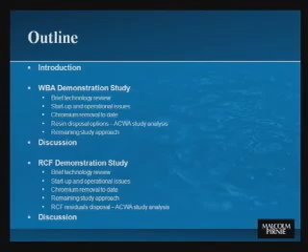Follow that up with some of the startup and operational issues. This is really the lessons learned part of the presentation, where it's one of the reasons that you have a demonstration facility before you go to a full-scale facility, so that you can really iron out all of the issues associated with it and move forward very expeditiously with a full-scale treatment.

And then I'll talk about the chrome removal to date, so how well are the technologies removing chrome. Discuss some of the residuals issues, like for weak base anion exchange, the resin disposal issues, which we have an additional grant from the Association of California Water Agencies, ACWA, to look at this in more depth, because the residuals from the process can really be cost drivers as well as more difficult to handle.

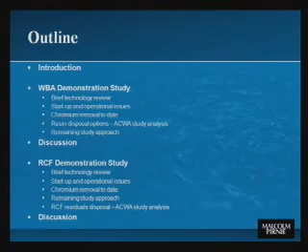And then finally, we'll discuss the remaining study approach for the remaining 6 months of operation, and we'll get some discussion going between the PAC members. And then we have basically the same setup for the reduction, coagulation, filtration, the RCF process, and follow that up with discussion as well. So jumping right in, the introduction is, I just wanted to give a feel for the many different funding sources that are helping to support this work.

The US EPA is one of the primary funding sources, and California DPH through the Proposition 50 funding. The Association of California Water Agencies sponsored part of the residual study, including looking at disposal options and costs. And then there has been some additional support from the Glendale Respondents Group, particularly for the carbon dioxide system that I'll talk about as we go through the slides. Okay?

So the weak base anion exchange technology is basically the idea of filtering out chromium. Chrome-6 is removed using this particular type of resin. So chrome is exchanged onto the surfaces of the resin beads. They're very small beads, less than a millimeter in diameter. And the chromium is then retained on the beads. And what we found in some bridge project studies prior to these demonstration studies is that the chromium is actually reduced on the resin. So it becomes chrome-3, and then it's stabilized on the resin, and the resin has a very high capacity, much more than for a regenerable anion exchange facility, which is more standard for chrome-6 removal.

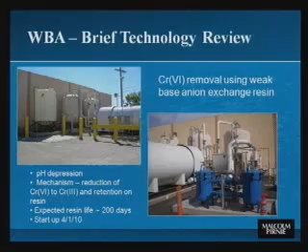The expected resin life is based on a target effluent goal of 5 ppb, micrograms per liter, out of the effluent of the second bed. So these facilities are operated in lead lag configuration, where the water goes through the first bed and then through the second bed in series. And that allows you to maximize how much chromium you absorb onto the resin in the first bed before you need to change that out.

So given those assumptions that you're looking at a target goal of 5 ppb out of the effluent, the expected resin life is about 200 days. And I'll go into some of the issues that can be considered if you want to extend that or cut it back. I'll talk a little bit about that. And again, the facility was started up on April 1st.

So now jumping right into some of the startup and operational issues. One of the very first issues that the PAC and the operator, CDM, had to deal with was formaldehyde leaching from the resin. The resin itself is a phenol formaldehyde polymer, and it was not expected, but we did find that some formaldehyde leached off of these resins initially, particularly when the resin sits in the vessel and doesn't have water flowing, so it equilibrates into the water.

We also did see bacterial contamination because there were some startup issues with the facility, and the vessels sat stagnant for a little time, and so bacteria built up on the resin.

So as a result, what had to be done was what's called the brine squeeze procedure that Siemens did, which was to remove the resin back out of the vessels and then perform this process, a pretty substantial process that could take a day or two at the Siemens facility, including first backwashing, then a caustic wash, sodium hydroxide, followed by a rinse, and then an acid wash, another rinse, another caustic wash, another acid wash, and then finally rinsing to obtain the optimal pH and neutral pH for the resin.

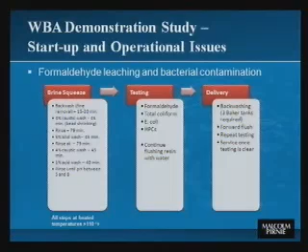We did find that we needed at least 3 Baker tanks that are 20,000 gallons each, so a significant amount of water storage. And that really was because the sewer discharge permit for the city of Glendale at this particular location necessitated having non-detect levels of formaldehyde in the water. So some treatment needed to be done because there were some minor levels initially. And also, there's a limit on the flow rate of what could go to the sewer at a given time. So then that was followed by a forward flush, repeat testing, and then the water was finally delivered to the Glendale Water Treatment Plant, where it blended with the other well water, and then at that point the water was served.

In terms of bacterial contamination, some questions arose during this process. One of which was, how could this resin be disinfected if positive bacteriological samples were observed? And we don't know that we have a great answer for this at this point in time. So this remains one continuing issue. The brine squeeze did work very well, but once you have the resin in place, if you have a bacterial problem, what can be done at that point other than taking the resin back out again?

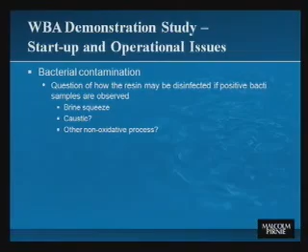So the brine squeeze is one option. A couple other options that might be possible are caustic, as done for GAC at the Glendale Water Treatment Plant, and potentially some other non-oxidative processes. So this is something that still is a little bit of an unknown. Luckily, we haven't had to deal with it because there haven't been bacteriological growth problems on the resin at this point.

pH monitoring was another startup and operational issue. Initially, there was a pH probe put in line at the weak-base anion exchange facility on the influent. So after the water had the carbon dioxide added to depress the pH to 6, we wanted online monitoring to make sure it actually remained there at a pH of 6, because the resin is not as effective at removing chromium at a higher pH.

The first probe failed, which was hypothesized to be because it was allowed to become dry in the pipeline. The replacement probe that was sent from the facility didn't work, and now this third probe is actually found to be very effective. CDM is doing preventative maintenance at a pretty aggressive time frame of calibrating once a week, just to make sure that they stay on top of this probe that works.

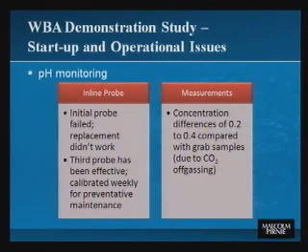One other thing that we noticed and expected to see was that concentration differences are observed from grab samples that you take from the water compared to inline samples. And that has to do with carbon dioxide off-gassing and the pH increase of 0.2 to 0.4 pH units during off-gassing when you actually take your sample. So having that online monitoring is really important for this process.

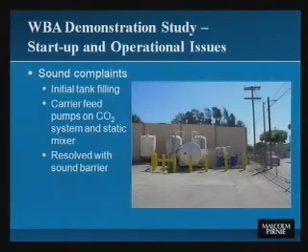So a couple of the things that caused these sound complaints were initial tank filling of the carbon dioxide and the carrier feed pumps for the carbon dioxide system and the static mixer. So what was done to resolve this issue was a sound barrier was constructed around all four sides of the pumps, leaving open the top for heat dissipation. And that has worked.

So now moving into chromium removal to date, this might be a good time to have the PAC ask any questions related to operational issues if we want to discuss that. Yes. Nicole, thank you for the good overview there. A question I had was the pH probe being calibrated weekly. Is that something you expect is necessary as due process from now on, or is it just something particular that you're trying to address in terms of maintenance? And is it being determined further, or are you accepting that weekly maintenance is just due process?

I might defer that to Charles or Rich. In your discussions with the vendor of the pH probe, did they recommend that, or how did that come about? Good morning. My name is Rich Boudet with CDM. What we've found is the probe tends to drift a little bit. So if it drifts, we were using more CO2. So to try to keep that a steady usage, I was calibrating weekly. Sorry, I should have clarified. Is that something you consider a regular feature of the probe, or do you want to look for other probes that may not shift as much? I think it's probably wise to say that we would maybe look at other probes to make sure they don't drift. Okay, fair enough. Thanks.

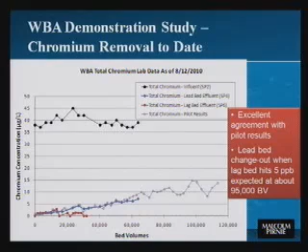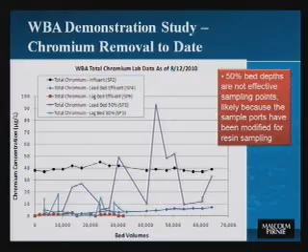So we think that there might be a problem with the way that we're using the sampling ports for two different purposes. We're using it to sample resin, so the screens have been removed. And so as a result, you wind up with a slug of resin in the sample line that is discharged when you take a sample of water. So normally when you're sampling water at a 50% bed depth, you have a screen, and so you don't collect resin. And so you essentially have a mini ion exchange column in there that's been equilibrating in the sample port line. So we're getting really spotty results.

So we don't think it's worthwhile to keep sampling these 50% bed ports. We think it's kind of a waste at this point. There's also the other issue, which is that we are sampling resin once a month, and so there could be short circuiting right around those sample ports as well. So we're not seeing great results there. We're getting much better results, as seen on the previous slide, from the effluent from the lead bed and the effluent from the lag bed. So that might be a potential cost savings to reduce sampling at those points.

Now, one of the tasks that we had in the ACWA study is to assess what the weak-base anion exchange residual disposal options were. And so in this process, we developed a decision tree, noting that there are two main drivers. One is whether the waste becomes radioactive, because it naturally accumulates uranium that happens to be in the water at very low levels that are below any MCLs for uranium. And then also, the weak-base anion exchange resin can become hazardous because of the accumulation of chromium over time. It accumulates so much chromium that it can become a hazardous waste.

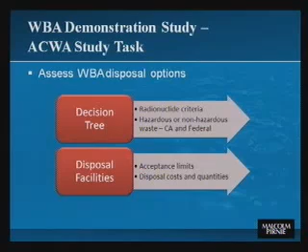We also looked at disposal facilities and which facilities would accept different kinds of waste. And so when we went through the exercise of determining what criteria for waste we might have, we looked at different disposal facilities. We got cost estimates from them, quantities they would accept, and how to actually go about doing disposal. Okay? Here's the decision tree. It might be easier to look at your handout to be able to see this in detail, but I'll just walk through it really quickly.

First, the first question is to determine if it's really a solid or more of a liquid. So you do the paint filter liquids test here. And so if it is considered a solid, we go down into this tree. If it's not a solid, then you need to separate out the liquids and then start over again in the tree once you do have a solid.

So now into this part of the tree is the waste, RCRA hazardous waste. This is what's considered a federal hazardous waste that essentially fails the toxicity characteristic leaching procedure, the TCLP test. And so if this is an RCRA hazardous waste, then you get into the next question of whether it contains radionuclides like uranium. If it does not, you can dispose of it in a hazardous waste landfill.

If it does, the question becomes, well, does this waste contain greater than 0.05% source material like uranium and thorium? If it does not contain greater than 0.05% source material, then you can dispose of the waste in a hazardous waste landfill that's licensed to accept technologically enhanced hazardous waste, like it's called TENORM, naturally occurring radioactive material.

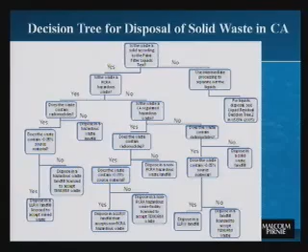Or they could operate it to avoid that limit and so really focus on the uranium level and be able to send the waste to a non-RCRA hazardous waste landfill. So those were the two options.

I can actually move this now, can I? No? Okay. I won't try it.

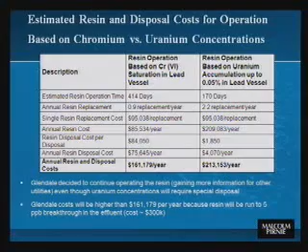If you really focused on the uranium accumulation in the vessel and changed it out much more frequently, the extra disposal costs associated with a low-level radioactive waste did not overcome the extra costs associated with the resin. And part of that has to do with because the resin is only available from one provider at this point in time. There's only one of these weak-based resins that's been NSF certified at this point. So the cost is the cost. There's not a lot of bargaining power there.

So what Glendale decided to do was to keep operating the resin, knowing that it would eventually trigger the source material level. And why this was decided was to really gain more information for other utilities, because this approach actually is costing Glendale a little bit more. It's going to cost about $300,000 instead of $161,000, because we are looking at a target effluent level of 5 ppb rather than going to saturation on the first bed.

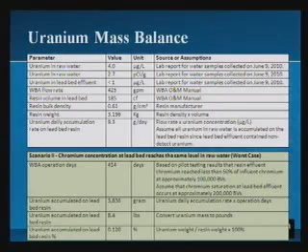And what we wound up expecting the resin to get to is 0.054% under these conditions. So just slightly over the limit that will trigger low-level radioactive waste categorization. So now the other scenario, which is a worst case of chromium reaching saturation in the lead bed, so what other utilities might choose to do if they had uranium concentration similar to Glendale, that would lead to about 8.4 pounds generated or accumulated on the bed. So still below the special licensing requirements. Okay.

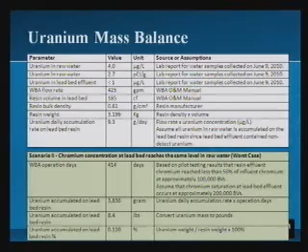Now, we've also been doing uranium sampling of the resin. As I mentioned, we've been taking resin samples. By we, I mean CDM. We've been doing resin samples for uranium at 25% lead bed depths, 50%, and then most recently a composite sample of 3 different bed depths. And so far, if you focus on the one on the bottom, we're still below on a composite basis the 0.05 at this point in time, which is what we'd expect based on only being about halfway to the point at which we want to change out.

Okay. So now the remaining study approach, before I open this back up for discussion: the plan is to continue running this resin until we reach 5 ppb in the effluent of the lag bed, which will trigger the change out. The idea being we will need to dispose of this spent resin at Energy Solutions in Utah, which is the one facility on the West Coast that's able to accept this low-level radioactive waste.

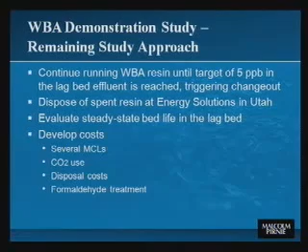We will then evaluate the steady state bed life in the lag bed by replacing the lead bed, or changing the lag bed into the lead again, and then seeing where we're at in terms of concentrations and how long the bed lasts. And then we'll finally develop costs, evaluating several MCLs and how that might impact California utilities in particular. We'll develop costs on the carbon dioxide usage rates, disposal costs, and that's again where the Aqua study ties in. And then develop the costs more formally for the formaldehyde treatment. Okay. And then if anybody has any questions.

Yeah, I do have some questions. Just a point of clarification. You say you have VOCs go to your resin, right? VOCs? Yes. So what kind of VOC and the concentration? And also, have you thought about the impact on your bacterial contamination? We haven't seen continuing bacterial contamination on these resins. In terms of VOC concentrations, I don't know if that's actually monitored. Do you guys monitor monthly VOC removal from the facility, or is that just RCF process? That's only in the RCF.

Just monitor the raw water on a monthly basis. Okay, so just the raw water. So we're not looking at how much VOCs are removed by the resin. I'm not saying removing. If I remember correctly, it's a resin operation. Oh, that's the RCF process. So we'll get into talking about that, yeah. Oh, okay.

And in terms of the uranium, have you measured the radiation around the vessel? We've been told that that's not a problem based on the isotopes of uranium, that they can't actually penetrate the vessel wall. Well, sometimes to say it is one thing, to verify it's another thing. I don't know if anybody's taking a Geiger counter out there, no. Good point. Okay. Thank you. But that will be done during disposal. Okay. Sure.

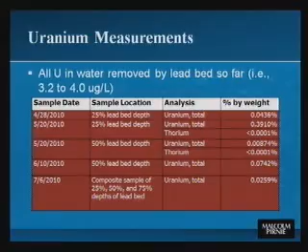Yeah, that's one of the inherent problems with the resin sampling, I think. And then when the beds finally exchange, are we going to try to do a composite of the resin after it's removed in some way that's more rigorous? Or at least a core, yeah. It would be ideal to be able to mix it up and then take a sample. That's the goal. I don't know how. How about the plan? Is it the plan? Okay. Yeah. Okay, good.

Okay, next, switching gears on you. When you guys met 3 or 4 years ago, the big issue for the WBA system was TICs. The concern was when we reduce hex to the trivalent, something's being oxidized. What is that? Are we losing something from the resin that's going to be some kind of VOC into the water stream? And you didn't really have a slide on it, but you mentioned at one point that TICs were not showing up. So can you elaborate, how many samples have been done on the effluent water? Is it the effluent water from the ion exchange beds, or is it blended from the whole plant? And so how many times have you looked for TICs in effluent water, and what have you found?

This is a question for Richard Charles, if you recall. I know it was done initially. And by the way, we did have more than just formaldehyde. Yeah. We did have some nitrosamines, and there were a few other loose ends, minor stuff, like ketone. But it all was resolved pretty quickly? Those resolved quickly. So I believe we did sampling every so many hours initially of flushing to make sure we were getting nitrosamine flushed out and other things.

So I don't want to put you on the spot today, but maybe as some kind of follow-up, let's follow up on how many samples have been done for TICs and what actually has been found or not found, ideally. Because that was the key thing from this panel a few years ago. Yep. Okay. That's it. Thank you. Okay, we'll put that on the list. Thanks.

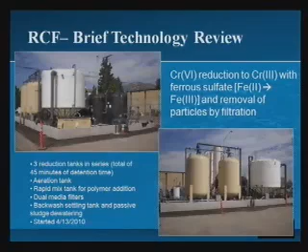And then the sludge is sent to this sludge bin right here, which is a passive means of dewatering the residuals. So instead of having like a belt filter press, something more costly, the idea is to have the water basically go through a felt liner in this, what looks like a dumpster here, and the solids stay within that felt. So this facility was started on April 13th.

Some of the startup and operational issues that we've had with this particular process, one of the primary things is that there's a lot of moving parts. So you'll see a lot of different types of issues. The first one was total coliform positives that we saw during startup. This was resolved a number of ways. I was just talking with Charles this morning a little bit more about this.

One thing was sealing the open space. There was a little bit of open space at the top of the vessels and the mixers, around the mixers. So that was actually sealed. We thought that we actually saw some bugs getting into there, so that was a potential source of bacteriological contamination. The other issue is that there was a pipeline constructed to bring water to this facility, and that sat stagnant for a period of time and might have built up bacterial issues.

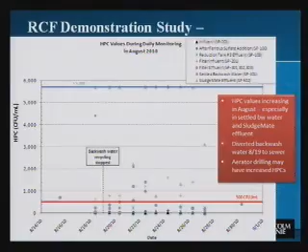So what this meant, though, was that you are getting a pretty significant loss of backwash water. We think it's about 4% of the flow of the process, although we'll have to do those calculations exactly down the road. But one thing that we wanted to do is try to really conserve as much water in the process as we could. So that's problematic if that's the case. And there's an issue with this particular technology that you can't add chlorine to the process because it will reoxidize the chromium that's reduced. So that's one limitation that has to be dealt with when we're doing this process.

One other thing to note here is that there might have been another source of HPCs, which is we discovered in early August that the aerator was not aerating the water properly. So we weren't really getting bubbles. The diffuser holes were clogged, and I'm going to talk about that in more detail. But there's the potential that might have introduced some HPCs as well to the process.

So luckily things are coming back down to normal, and the levels are getting low. But as Charles was mentioning, this has happened a few times. So this process does seem to have a tendency to develop these kind of issues more than the weak-base resin.

One of the things that might have contributed to this problem and to seeding the process is the backwash water storage tank. We did see a significant buildup in the sludge and also some media, some anthracite in there. And so Rich of CDM actually had to go in there and clean that out by hand. So one thing in the future would be to consider putting in a mixer or something like that to allow good mixing, to break this up and then allow the water to settle. But this was something that happened. And since then, they've also modified the drain line to be a little bit bigger too, to handle more.

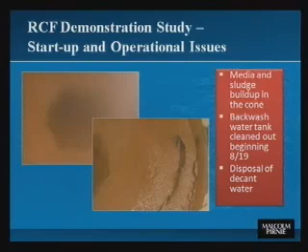Okay, next slide. Now some other startup and operational issues. The ferrous field results we found to be less than ideal. We did get lab confirmation that oxidation occurred during our dilution of the samples. So when we were trying to validate the ferrous content of the ferrous sulfate solution, we'd get great agreement with the approximately 5% of iron in the ferrous sulfate solution, but then the ferrous result would be way off. And we found that to be most likely due to oxidation occurring during dilution, or a problem with the method itself, just not being accurate.

And so we actually purchased some standards of ferrous compound, made up the standards ourselves from a solid solution, and we still saw that same problem. So it's not very effective to keep measuring ferrous in the field, but measuring total has proven to be good. And we did confirm that the ferrous content of the ferrous sulfate was as expected. Okay.

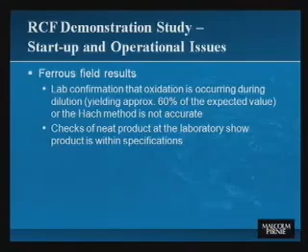Another challenge has been the clogging of the ferrous sulfate injection quill at the injection site, and also the clogging of the aeration tank diffuser ring holes. I might have done that, sorry. Here's some pictures of the aeration diffuser ring, and by ring I mean square, where you can actually see on the right-hand side the size of the holes. When Rich pulled this out and discovered that it was clogged, he re-drilled the holes and made them much bigger, and then we had visual confirmation that the water's being oxygenated.

But up until that point, the aeration tank was sealed. So there's a significant period of time of this testing in which we don't know if the aeration was actually working. If you put your hand to the side of the aeration tank, it felt like it was, but when Rich opened it up, there were no bubbles.

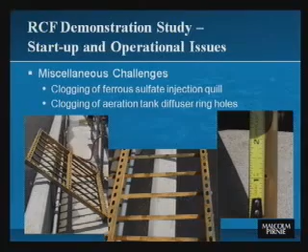And Nicole? Yeah. Where's the hole on the right side? Is it over by the... Yeah, it's right by the number one. Right there. That little teensy hole. Okay. So now he drilled them out to be double that. And now we're thinking it clogged again after 3 weeks of operation. So one of the initial issues was the aeration wasn't on for 2 weeks, which is why we think it clogged up at that point, because there was a significant period of time it was operating and the iron hydroxides could build up in there.

Okay. Next slide. Thanks. Do we want to go through again some of the operational issues before moving forward to the results? I'm okay. Let's break and discuss that if you have any questions. Done? Not me. Maybe there'll be more when it's tied in with the results. Some things may not matter, Nicole.

Yes. Okay. So chromium removal: here is the chromium concentration on the influent, which has been increasing from about 65; now it's about 85. And here are some examples of what happened at different points in time. So we did start the aeration on May 6th, but as I mentioned, the diffuser holes might have been clogged at that point.

Up until this point, this was run at a 25-to-1 iron to chromium ratio, which was found to be effective in pilot testing, and a 24-hour run length. Now, two things were changed here. It was changed to a 30-to-1 and a 48-hour run time on July 13th. The iron to chromium ratio was increased because we were not really getting down to the levels that we'd hoped.

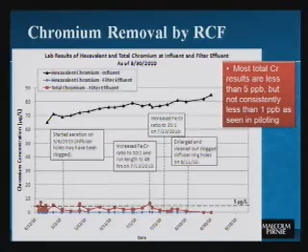We were getting mostly below 5 parts per billion, but in pilot testing we saw below 1 part per billion very consistently. And so we knew it could be done, and we wanted to figure out how to get to that point. So these two changes were made, and the concentrations did decrease quite a bit, at least in the next couple points. We did increase it one more time to 35-to-1, just to make sure. And then the diffuser ring holes were cleared out on August 11th, and then after that we got our first 2 less than 1 part per billion results.

Okay, go to the next slide. Here's a blow up. So now we're looking at a scale of 0 to 8 parts per billion, so looking at what was in the noise there. So you're seeing here's our target of 5 parts per billion. So most concentrations were below 5. But we did think that some of these issues had to do with turbidity breakthrough.

And right now we're actually working to take down a lot of information from the SCADA system and figure out turbidity trends so we can map whether this was the result of turbidity breakthrough or not. But it seemed to us that the turbidity was higher during these particular events, and that the particles just were going through and were not being built up sufficiently. So as a result of bringing the aeration back online, all of a sudden we got these much better values.

And an interesting note that we've seen is that a 48-hour runtime seems to be better than a 24-hour runtime, perhaps because there's a buildup of those particles, and then other particles that are smaller can flocculate with those. So that's what we're seeing right now. So what we've done at this point, we ran for 3 weeks at this 35-to-1 ratio and a 48-hour runtime and we got these good results. So now we're dropping that back down to 25 to 1 and running there for 3 weeks and seeing if that's effective. Making sure that the aerators are run, that the aeration is effective, and then we'll compare that with some of the other data.

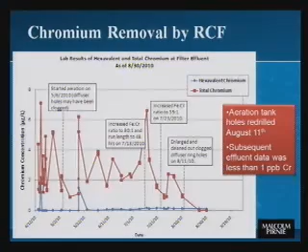Okay. So now in gray here, I'm showing a matrix of the different runs. So what we've done so far, breaking this up into 8 different runs. So the first one was no aeration, which was inadvertent, but we did that for at least 3 weeks. And then the next run would be maybe there was an aeration step, we don't know for sure, and a 25 to 1 and a 24-hour run length. That was increased, as I mentioned, to 30 to 1, then 35 to 1, and then after the aeration brought online for sure, we have that run. So now that's the point we're at. We're running this one at 25 to 1.

Now some of the other things that we want to test are turning the aeration off on purpose and seeing how that performs at 25 to 1, and seeing if that does agree with some of these previous runs, if we don't get quite back down to 1 part per billion again. So verifying the effect of no aeration. And then going back to adding the aeration again, if run 5 was effective at the 25 to 1 ratio, looking at less reduction time. So could we go from 45 minutes down to 30 minutes? If that's effective, can we go down to 15 minutes of reduction time? And in pilot testing, we saw that we could, as long as we had aeration on for those particular scenarios.

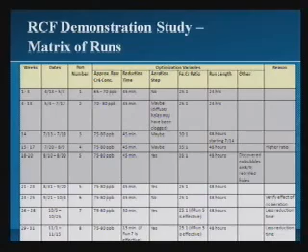Okay, next slide. So now the next question, and something that I posed to the PAC, is where else do we want to go with the study? We think we really need to validate some of the initial findings. There was a significant amount of startup time and trying to iron out all of the different variables associated with this system. So we don't have very solid results at this point in order to say that the process can be optimized in these particular ways.

That is. Oh, it's my paper, sorry.

So we don't know at this point in time how we would change the process if we were to optimize it. So we wanted to use the next 6 months of testing in order to really get at how can we optimize this process, because we know that the costs are very significant at this full process of 45 minutes of reduction time, having an aeration tank, and having the dual media filters. So that's one of the biggest questions: how can we really get this honed down so that the costs are minimal, moving to full scale.

So some of the other things that we could test, as I mentioned, verifying whether you need that aeration step, testing less aeration time. We could check 24 hours at the 25 to 1 ratio, make sure it's not the 48-hour, maybe it's a 48-hour runtime that makes the process more effective, which we should be able to evaluate better when we can download the turbidity data and evaluate that closely. We can also look at things like lower influent concentrations. We could do a blend, which might help to inform other utilities that are dealing with lower concentrations of how effective this process would be.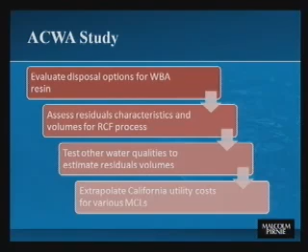But we'll look at the residuals characteristics, the volumes associated with that, see if that matched what we initially had costed out. We're going to test other water qualities to estimate residuals volumes for other water qualities. We're looking at 3 different utilities around the state to kind of get some bookends there. And then also extrapolating the California utility costs for various MCLs, as I mentioned previously. And that's all I have for slides. If anybody has comments on the RCF process, we could get into a bit of a discussion.

Sure. Can I ask a clarification? You did total coliforms from the RCF demonstration. Yes. Can you give us any idea what the range of values were? Did they kind of follow the HPCs? They did follow the HPCs. Some were fairly high. There were some where the HPCs were reasonable and their total coliforms were negative, or absent. But there were some that were pretty high, greater than 23 even. So it definitely varied. It did seem to mirror, though, what was going on with HPCs. What method are you using for that? Do you know? Colilert.

Is this water being blended also in going to the Glendale facility? It is, although it's not right now, since having these problems. We wanted to get to the bottom of it before we're doing that. But it does. It's 100 GPM. Don't think I mentioned that earlier. Sorry. But it is being blended with the other water. Thank you.

Okay, I have a couple questions. Your filter is dual media or tri-media? It's dual media. Do you think to test the tri-media, since you have particulates leaching out of the dual media? That's a possibility, as is the potential for microfiltration. And that really depends on, again, where the MCL winds up. If we're at 20, we know that this process really is effective for getting below that level for sure in every case, even without being optimized. But if we really want to get to 1, that's another matter. And at this point, we're not comfortable saying that we can reliably get to 1 every time. And we are, again, looking at very low concentrations to know where we are with respect to the PHG.

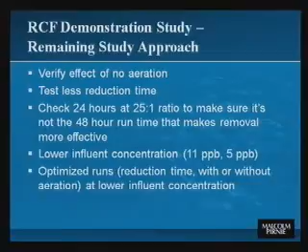Do you have a feel for what the critical variable might be for scaling the RCF process? In terms of cost, the reduction time being 15 minutes times 3 is a pretty significant footprint, and dealing with the sludge and so forth that builds up in those basins. So that's one critical variable in my opinion. The question of aeration is another one, because with the VOC contamination of this groundwater, you do have to have aeration treatment, air treatment. So that becomes a cost factor as well. Those two, I think, are the most critical.

Another thing that we've also been working through is what to do with the backwash water, how to optimize that process a little bit more, because we have seen some of these problems of buildup of the solids in the cone, and whether we want to recycle that and figure out a way to try to minimize solids buildup. So those three, I think, are the most critical. But I'd like to hear other opinions on what you think.

Well, if you're talking about reduction time, don't you think you should go back to the basics, look into the contact surface, those areas? It's not just using the current configuration to reduce that. That's probably an easy way, but might not give you an answer. Look into different kinds of reactors if you talk about the reduction time, because your system does have some deficiency or some kind of scale-up issue. So if you want to look into the reduction time, that might be a good way to look into that, rather than just reducing it, like serpentine piping or something that can increase the contact.